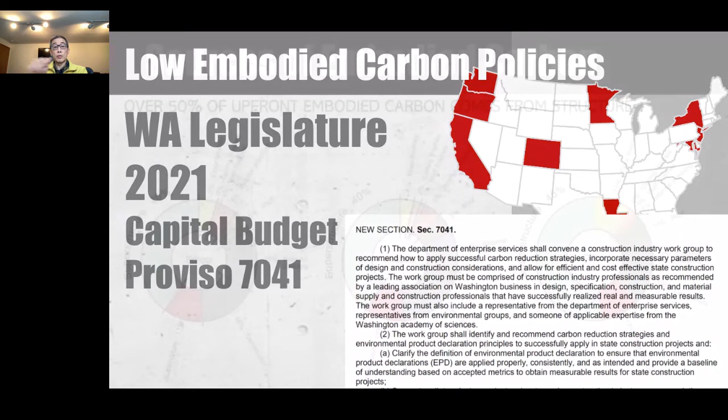There are a number of other bills around the country, as well as regulation and legislation, many of them called Buy Clean Acts, which seek to reduce the embodied carbon emissions of our construction materials. We know from research that more than 50% of the upfront embodied carbon comes from the structure, the superstructure and substructure of buildings.

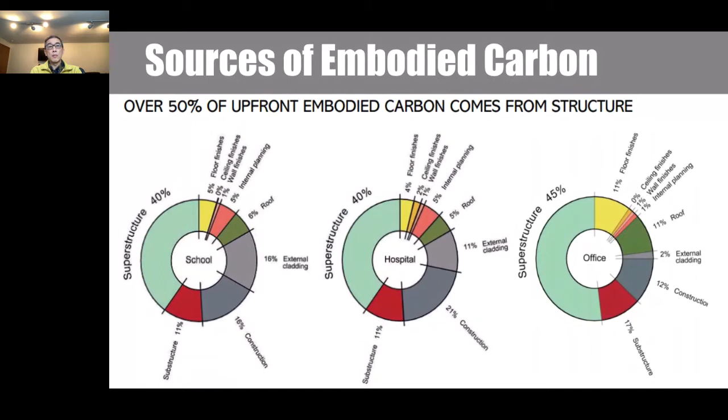Hospitals, offices, schools all basically say that if we want to reduce embodied carbon, it comes from the structure. So currently there's a green material narrative addressed to specifiers, the architects and engineers out there, where each material is competing against the others, but each also has its strengths: recycled content for steel, which is 90-something percent recycled content; for concrete, it's always a local material, you're not going to be shipping concrete from upstate New York; and wood, of course, is promoting its carbon sequestering abilities.

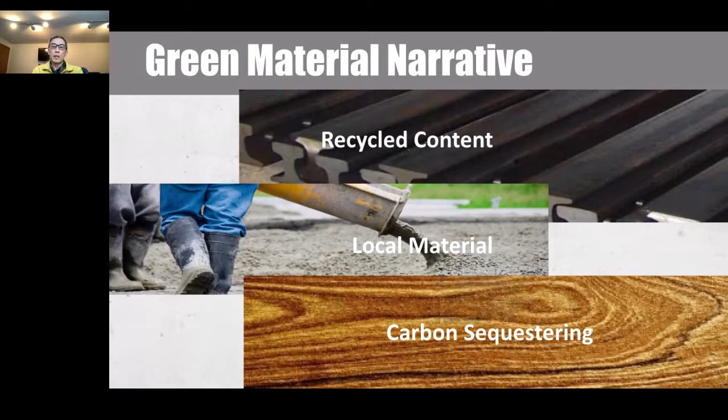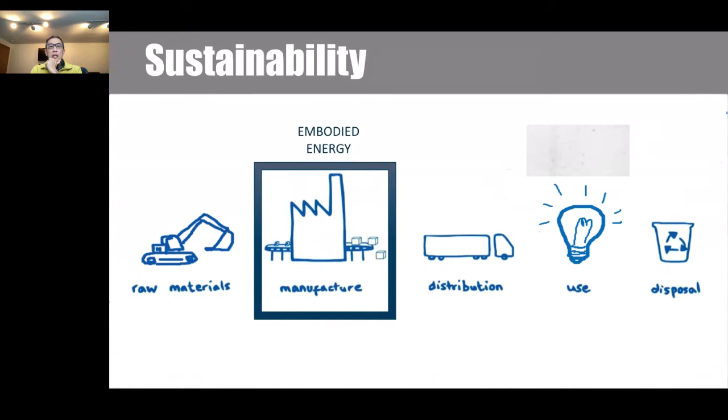But really, what we've learned in the past 5 to 10 years is that this language of single attributes, such as transportation distance, recycled content, or renewable materials like bamboo, is essentially a proxy for what we think is true sustainability. The true sustainability measure looks at all of these things at the same time and understands that everything we do has a trade-off. Using your phone, driving a car, using paper towels, all of it has trade-offs one way or another.

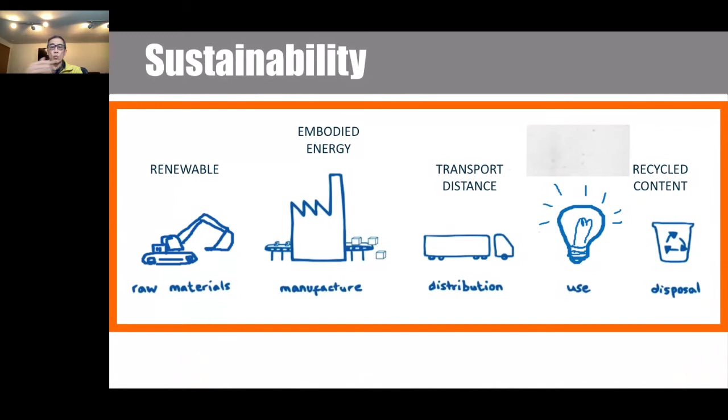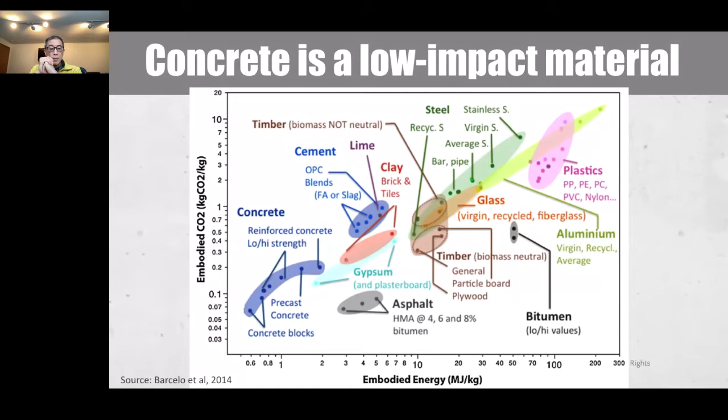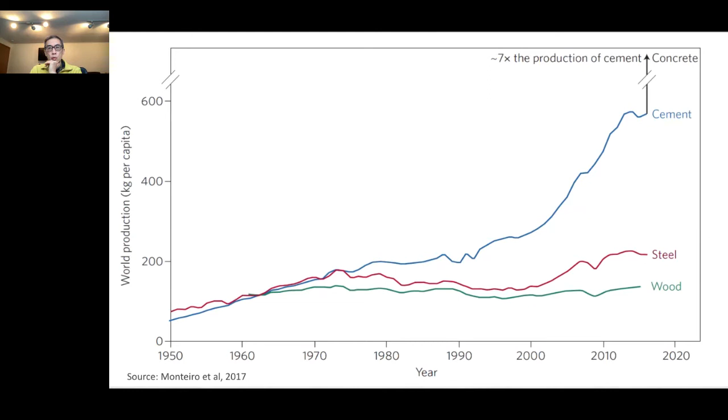But these numbers are on a per-weight basis, which isn't really meaningful because you're not using the same weight of materials. The reason you've often heard that concrete and steel are responsible for 8% of global greenhouse gas emissions is because the world uses so much of it. Developing nations are using concrete to build their infrastructure for progress, and the amount being used is essentially driving that number.

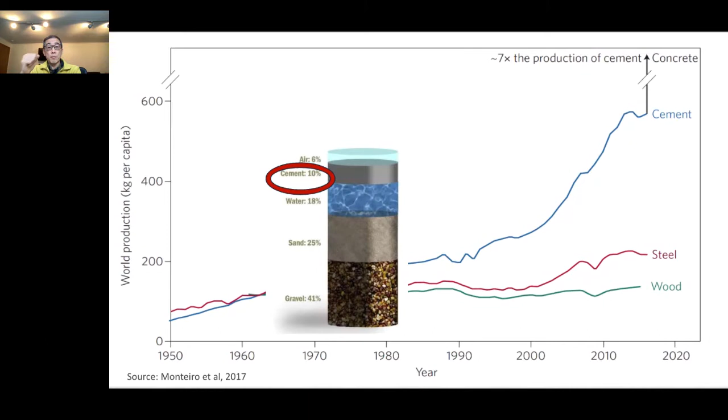I'm sure the audience here knows the difference between cement and concrete, but just to recap: cement is more or less 10% of the ingredients of concrete, which also includes fine and coarse aggregate, water, air, and some admixtures or other materials to meet particular performance requirements. Cement, as it turns out, is essentially 70 to 80% of the carbon footprint of concrete, so the drive to reduce the carbon footprint of cement is the primary goal for the industry.

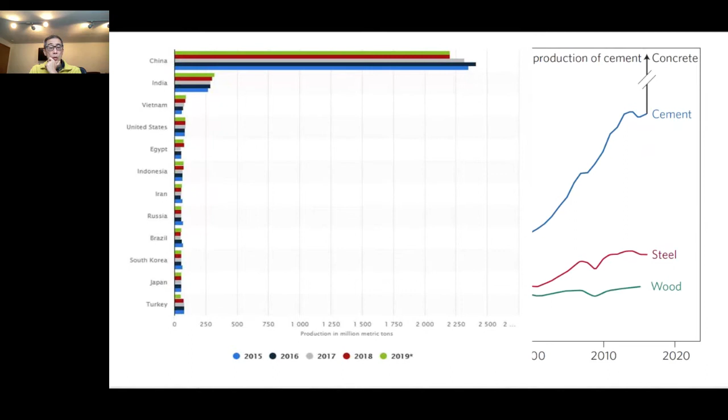However, having said that, the Global Cement and Concrete Association has already committed to a reduction to net zero cement by 2050, and that includes the major companies in China. So we are on our way to driving that number down, and everybody is working on net zero cements. There are a couple of plants being built in Scandinavia, and Bill Gates is secretly working on this energy source.

The biggest problem for cement is that in order to create the clinker, which becomes cement, you have to apply a lot of heat, which right now is only possible with fossil fuels, coal really. So the idea is to reduce emissions from calcination—a term you've probably heard—which is part of the production process, and drive that down to zero. People are working on it, and there's a plan. But we have to know that every material has embodied carbon emissions from across its life of use.

If you look at steel, the mining of the iron ore, the raw materials, to the production in the electric arc furnace, which is more efficient than the basic oxygen furnace, to transportation of the members, to its use, and then at the end of life, every one of these stages has some impact on our environment in terms of emissions. For steel, much of it happens at the end of life because it gets recycled back, so we can reduce the amount of emissions of the material by looking at the full life of it.

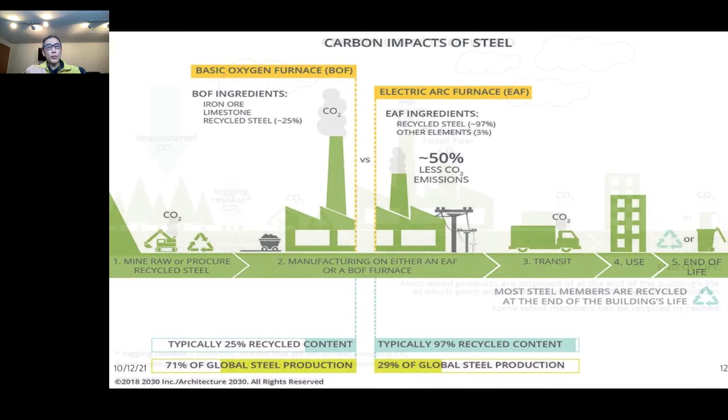Wood, however, is a different metric. A lot of the impacts of wood happen at the extraction phase, because think about how much of a large tree actually becomes a wood product. You're not using the bark, the leaves, the branches, the roots, or the soil that is also absorbing carbon in our forest. All of that is logging residue that is either burned as biomass, going up in the atmosphere immediately, or left on site.

And then obviously any production of materials has emissions for the creation of a wood product. And at the end of life, what happens to that material? Is it recycled, or is it in a landfill?

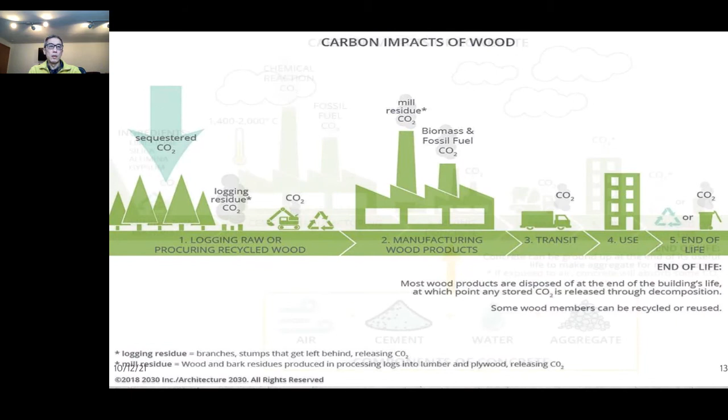And then I'll get into the details of impacts of concrete. But again, for concrete, the cement manufacturing is the primary driver of the carbon footprint. That is the fossil fuel use and the chemical reaction called calcination that releases carbon. Concrete itself is probably only 20-30% of that whole assembly's carbon footprint, primarily because you always use local materials, as I said, when you are getting sand and aggregate, which is everywhere around the world. You're not transporting it that far.

There's a benefit to the use of concrete. I'll talk about that later for the use phase, unlike steel or wood. And there is carbon sequestration that happens with concrete as well.

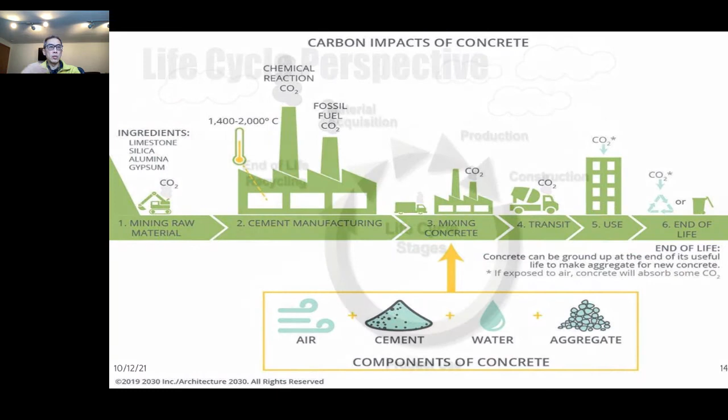So take a life cycle perspective when you're looking at carbon and also other environmental impacts when you are considering materials, any materials. I'll take a break right here if there are any questions that might have come up.

Anything? Nothing. Yeah. Nope, okay, there's nothing. I'm just confirming there was nothing so far.

Okay, thanks Grace. Yeah, so if we take a life cycle perspective, we can look at the product or the material in each stage of its life and see how we can apply strategies to reduce the carbon or other environmental impacts in these stages. So I'll just be going through this.

You don't have to read this. Material acquisition and production, construction, use phase, and the end of life. All for concrete has an opportunity for the designer and the engineer to reduce its carbon footprint.

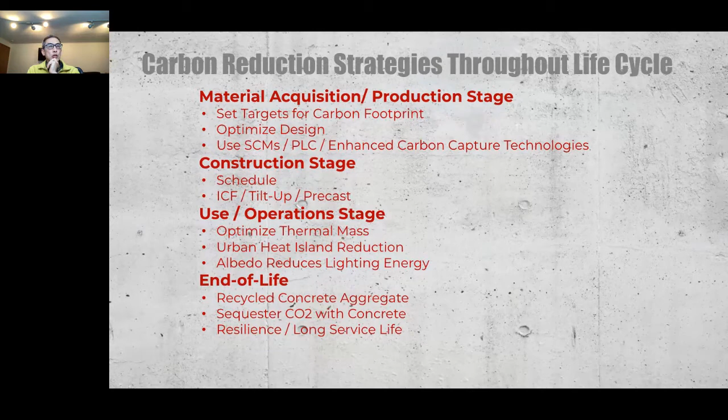And so I used this term many times in the beginning of this presentation, embodied carbon. Really, embodied carbon happens throughout every stage of the life of a product, from material acquisition to production, and the construction, use, and end of life.

For the use phase, it's the replacement of material. Think about your roof shingles, think about paint. Those are products that have a life that has to be replaced. So that is a part of the embodied carbon.

But much of the discussion in the design world today, and also legislative action that I mentioned before, is about embodied carbon upfront, initial or upfront embodied carbon. And that is primarily focused on material acquisition and production.

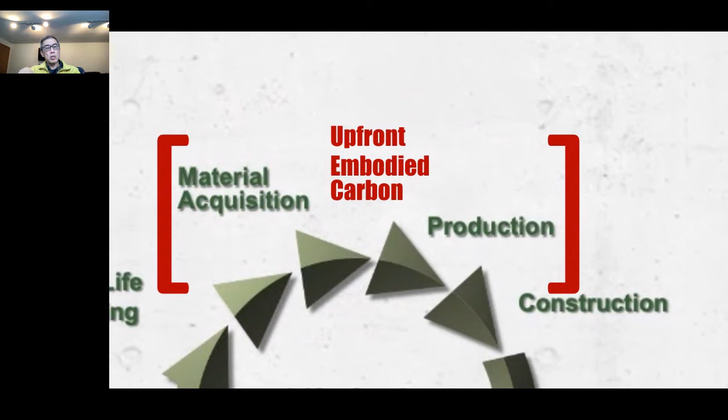So one of the main strategies, the most important strategies, is to understand and set targets for your project. That is to say, setting a carbon budget by understanding the project's carbon emissions and making sure that you work with and communicate those targets to the whole team, including the producers of concrete or other materials, for instance.

And many times we know, even from my work, the architect or the developer is so far removed from the production of the material. The concrete contractor, maybe not even talking to them, to the general contractor. And so having the whole team understand the goal is very important.

And there are tools out there right now that we can use from a design standpoint that, you know, some are free. Athena is free. Tally can be integrated into your Revit. One-Click is also more popular in Europe, but getting popular in the US here. EC3 is also a great tool that makes comparisons. It's not exactly a life cycle assessment tool, it just takes the data and makes comparisons. And you can use this little equation I put on the bottom by saying, look at all the mixes in your project and combine them to be a sum so that you can use that as your footprint.

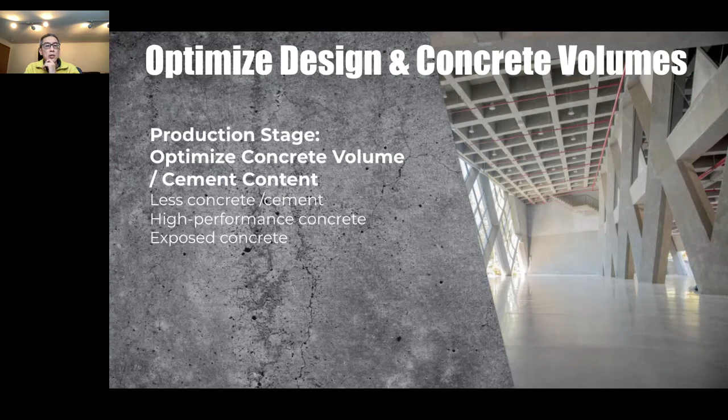Of course, we've all known for many years about SCM - supplementary cementitious material. SCMs are industrial byproducts, and pretty much all concrete in the United States already uses SCMs, because in the old days we used to call it 'oh, let's recycle some content and make us feel good about it' by recycling stuff from other industries. But we really know now that SCMs improve the performance of concrete - maybe not in early strength, but in ultimate strength and in workability of the material.

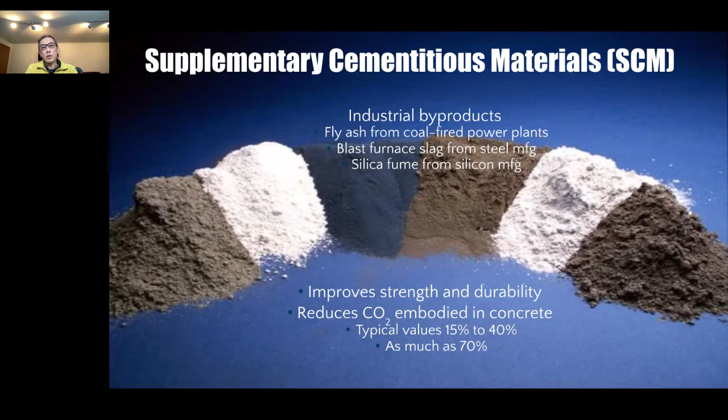It is the easiest solution we have right now. You can just use this to drive down the concrete carbon footprint with any producer by simply adding this material. I say simply - there's actually a shortage in many parts of the United States, including here in the Pacific Northwest. One of the important things the cement industry is doing is bringing blended cements into the U.S. market.

Blended cements have been used for 30 years in Europe, 10 years in Canada, somehow very slow to come into the U.S. market. It's a little bit complicated, but it has to do with our history of separation of our cement industry from the concrete industry. The concrete guys didn't trust the cement guys and didn't want them to give them cement that was cut with other materials. So they wanted to blend the cement with SCMs or other products themselves at the concrete plant.

Right now, Portland limestone cement is widely used in the Seattle market, Oregon, and just starting out in California, some in the Northeast as well. It's an easy way to immediately get a 9 to 10% reduction in your carbon footprint without changing anything else about the concrete, simply by using Portland limestone cement.

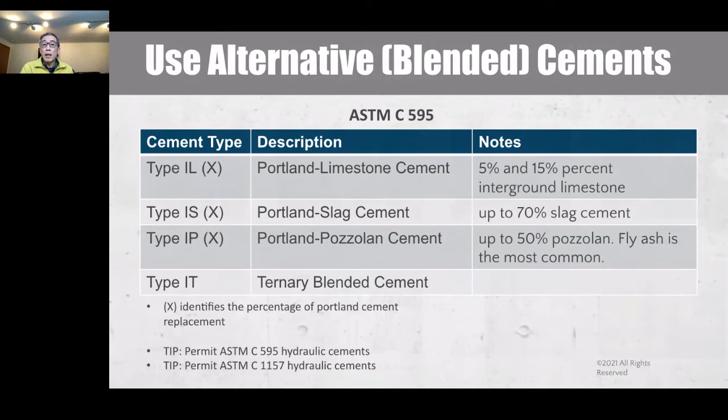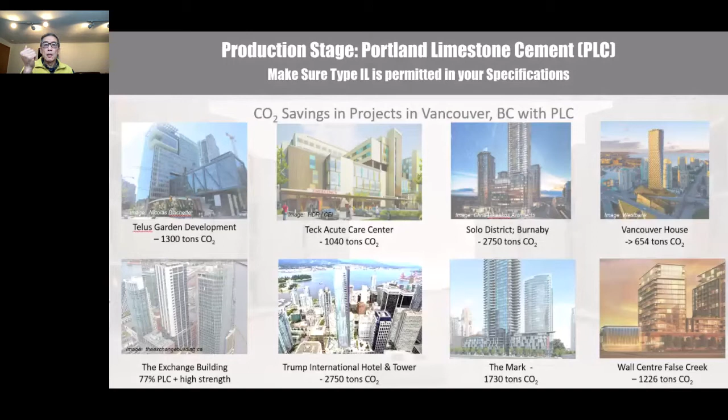There are tons of examples in British Columbia using Portland limestone cement, and these projects have all reduced the carbon footprint of their projects. Essentially the three major producers in the Seattle area, that's all they're using right now. So you could be getting Portland limestone cement and reducing the carbon footprint of your next project without even knowing it. Making sure you have it permitted in your specifications is important.

Another item in the production stage is enhancing carbon capture. Carbon capture, utilization, and storage is the big term for lots of climate activists right now. That's the future of all materials, and that's how we're going to solve the climate problem. I've been hearing that from people for the last decade, in fact, from people at Weyerhaeuser, where I used to work, over 20 years ago.

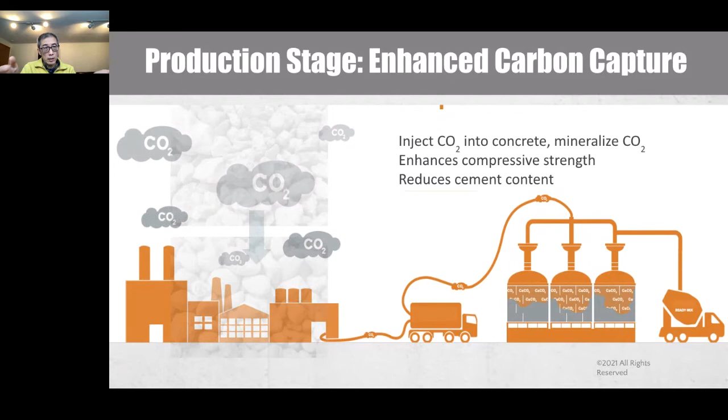The idea is that we want to use carbon the same way you use carbon in your soda pop, Coca-Cola, Pepsi — either injecting it or using that carbon dioxide in the creation of new aggregates. This carbon mineralization is already happening right now in concrete, with a number of different pilot projects. San Francisco Airport used this aggregate.

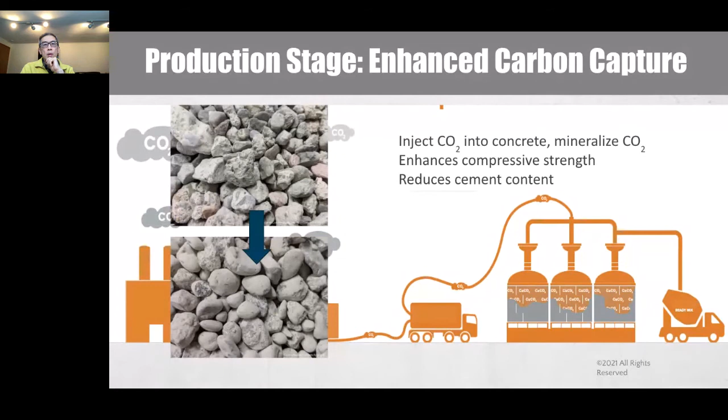All right, so any questions on some of those innovations at the embodied carbon extraction and production phase that coincide, align with what architects and engineers can do? Anything? No? Okay, I'm not seeing anything. Go ahead. Okay, anybody there?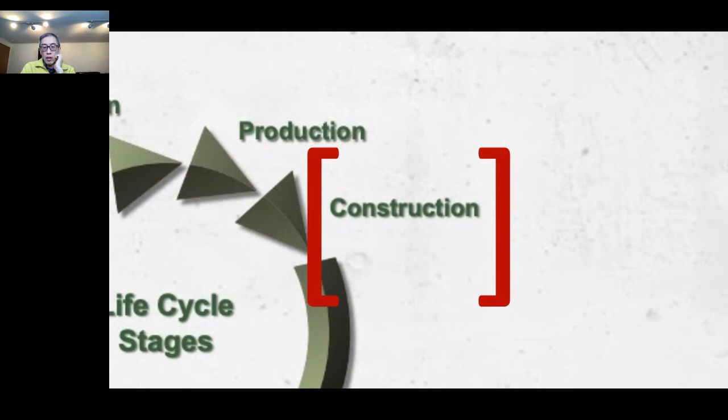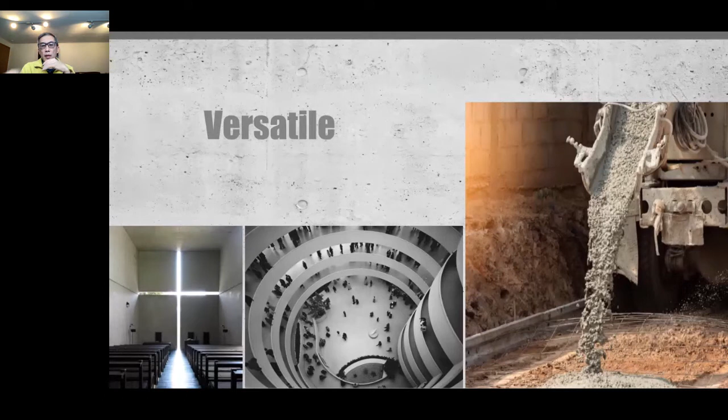At the construction stage, there are also things that can be done to help reduce the carbon footprint of material. We know concrete is a versatile product. At the same plant, you're getting different mixes with high strength, flowable concrete, something you can pump a long distance, something with a finish like the church Tadao Ando did. Everything can happen in one plant just based on the type of mix specified.

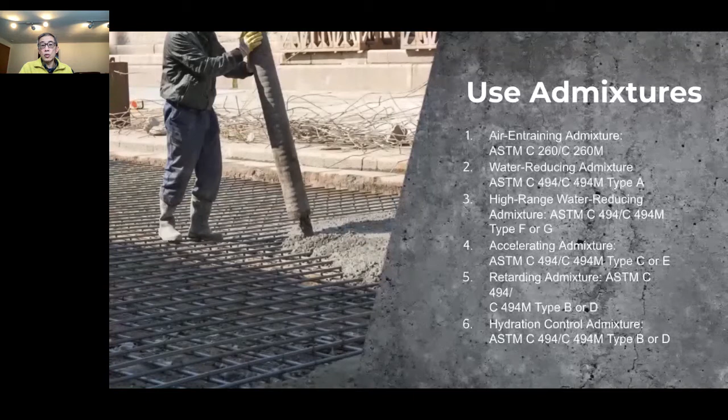One of the most important innovations we've always been using, but haven't thought of as a carbon reduction strategy, is admixtures. High range water reducing admixtures are so effective at reducing the amount of water content. Remember, concrete strength comes from the water cement ratio, and you have to keep that constant. When you reduce the amount of water, you reduce the amount of cement, and keeping the same strength, you can reduce the carbon footprint of any mix by 12% simply by using a high range water reducing admixture in a project. So admixtures are very important to reducing carbon footprint.

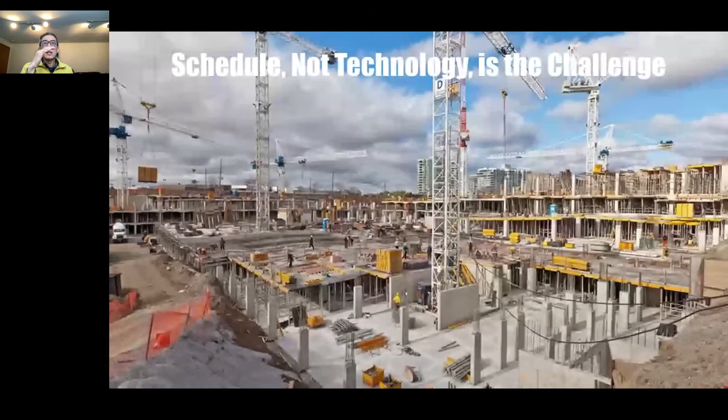But more importantly, we already know that technology isn't the challenge — it's actually scheduling. When we have to pull forms from a PT deck, for instance, we know we have to have a lot of cement content. You cannot have a lot of SCMs in that because in 3 to 5 days the contractor wants to pull forms. Essentially, our concrete is designed for contractors, not really for the project.

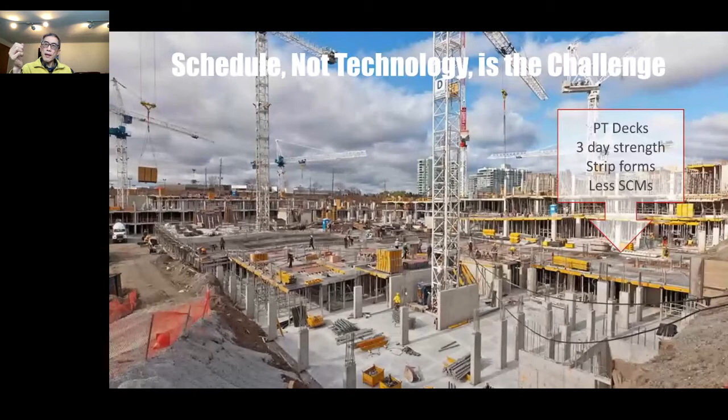We can build the same things the Romans did a thousand, or more than two thousand years ago, but we don't have the luxury they did of time. Our owners and contractors want things done very quickly because time is money. So when you need high early strength, you need a lot of cement. But if you had mat slabs, footings, shear walls — projects where you don't care about high early strength and only want later strength at 56 days or 90 days — you could put in a lot more SCMs because you don't care.

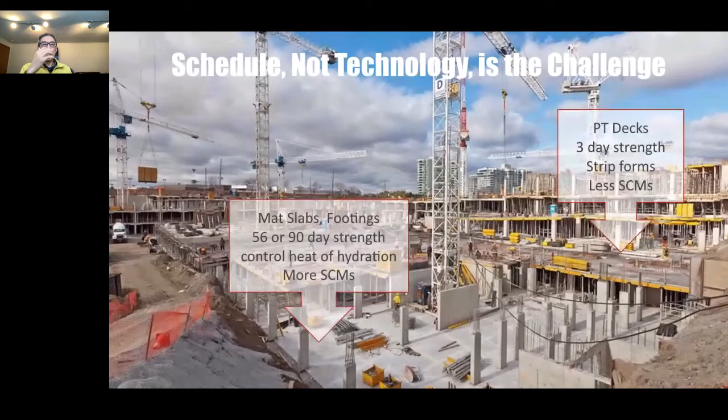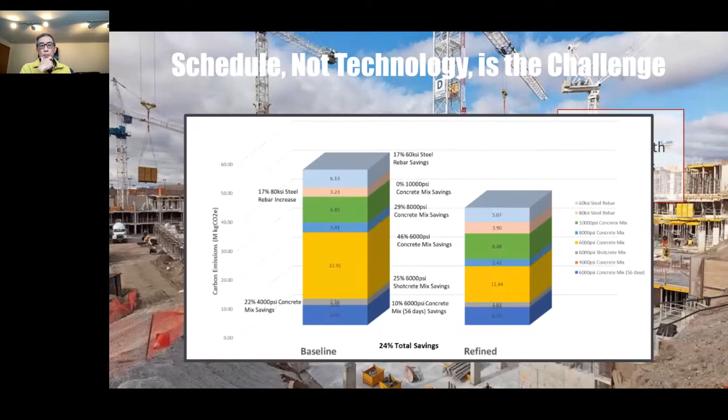So you want to balance the mixes with the different type of performance requirements that you needed. Here you can see a project, a baseline that has all the mixes, whether it's for 4,000 psi or 10,000 psi to 8,000 psi. This is obviously for a very large building. You can compare it to the baseline by driving down those mixes where you need to get to a lower carbon footprint. This happened essentially in the Helen Sommers building in Olympia.

Obviously, there are also innovations. I kind of use the term lightly, innovations, but innovations such as insulating concrete forms, SCC, tilt up, SCC for really large buildings. Essentially, that's how we build high rise. We've got to be able to pump it and flow it very high up.

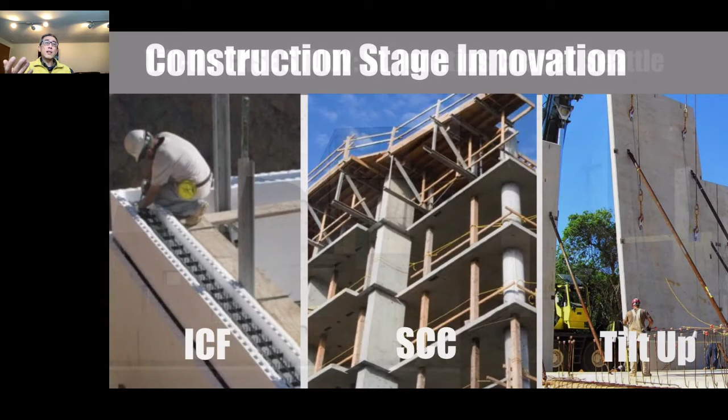Things like tilt up, we already have great examples here on small scale projects even. It doesn't have to be the Walmarts and the Home Depots. It can be like the St. Ignatius Chapel that we have. This is a tilt up project and can go up very quickly. And the speed of construction obviously saves time, money, and the amount of carbon that is being used in the construction process.

And so another ICF project that's a passive house in New York, the Bluestone organization essentially uses ICFs solely, and they do affordable housing in New York City.

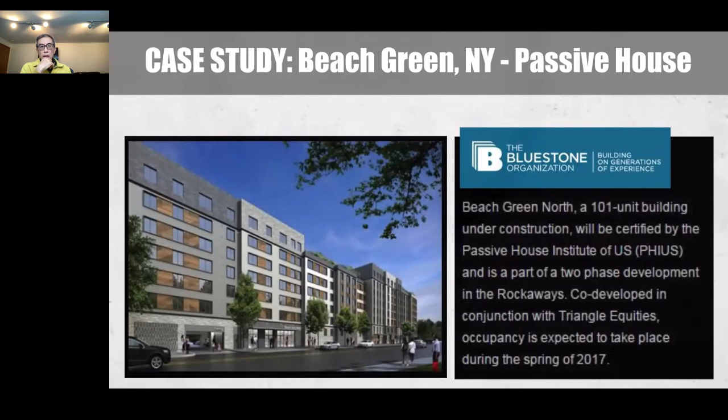Okay, so the production and construction phase, we've heard there are opportunities to reduce your carbon footprint. Product use, most materials have nothing to do with product use except when you replace the material. And when you look at concrete as a material, we know it lasts a long time. So we want to use material where we need it for its strength and durability. But concrete also has, because of its...

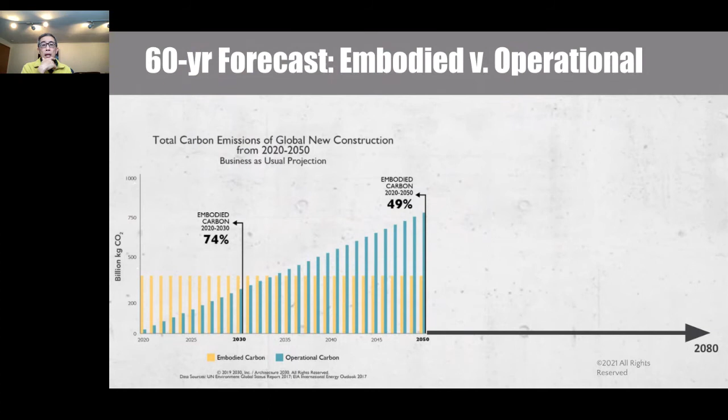Opportunities to last a long time, we see that the first graph that we saw where the looming deadline of 2050 from the Paris Accords doesn't think about what happens to the project after that. We know these buildings, especially ones that will be built in concrete, will last another 60 years, for instance. And in that time, we'll know that the embodied carbon will remain the same pretty much with some replacement of materials. But for a durable material like concrete, it'll essentially be only a quarter of the overall carbon of the project.

In a 60-year forecast, we'll see that in fact the operational impacts, that is the heating, cooling, electrical use, will overshadow the embodied carbon. We have to plan for that.

If you think about having more embodied carbon in terms of insulation in your project, there's obviously a break-even point. But if you have more insulation, you might save more in the operations in the long run. So having initially better windows, triple glazed windows for instance, all of that costs more in terms of embodied carbon, cost of carbon, but benefits in the long run.

And so we have to understand that the decisions at the initial embodied carbon stage, production and extraction stage, affects the operations phase as well.

We know the benefits of thermal mass. Those of you who worked in high mass buildings such as rammed earth or concrete know that there is benefits of moderating this thermal lag and dampening the peak demand of energy, allowing not only cost savings from reduction of HVAC equipment, but also more comfort and reduced carbon in the operations phase.

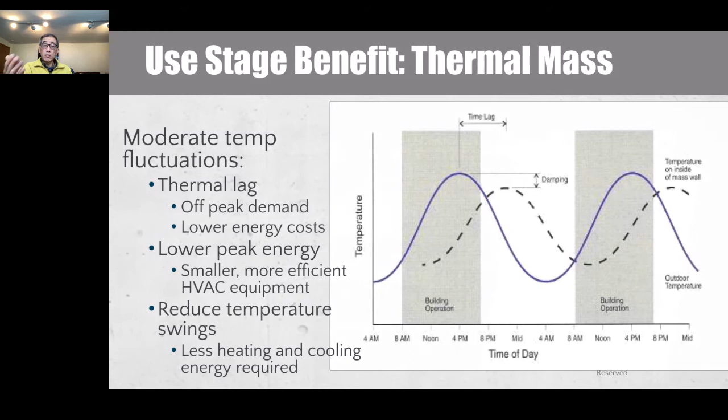This is the strategy that the schools in Kentucky use, we can learn a lot from Kentucky because we don't do this right now in Washington State. The net zero schools, there are dozens and dozens of net zero schools in Kentucky, and they were the first ones to do this. They essentially get the paycheck of one school teacher every month from the utilities by having a building that is net zero.

Richardsville Elementary School just happens to be the first one. And when I was on the Code Council, we talked about how much we can put into the walls, the envelope of the building, to make the building even more efficient.

But there is a point of diminishing return for our buildings. We can't all make buildings that are so super insulated like Passive House. We should, but right now it becomes cost prohibitive, as well as something that some folks are still only getting to understand.

But what we can do is reduce the amount of heat island effect that encroaches onto the building. In hotter climates, for instance, the heat island effect of our asphalt pavements and parking lots can drive up the heat around the building that has to be cooled. It can be 3 degrees warmer in residential zones and up to 7 degrees warmer in commercial higher density zones.

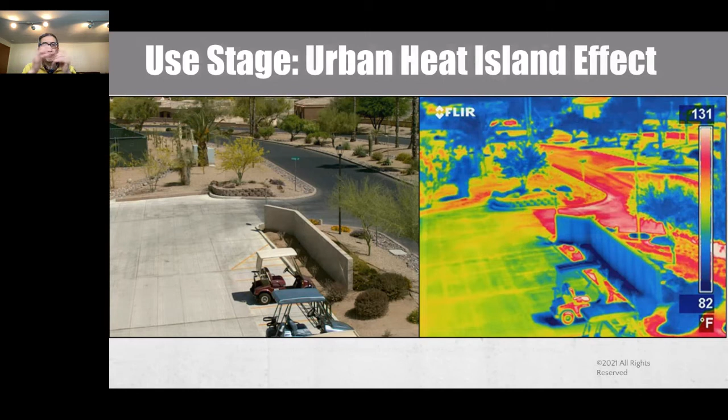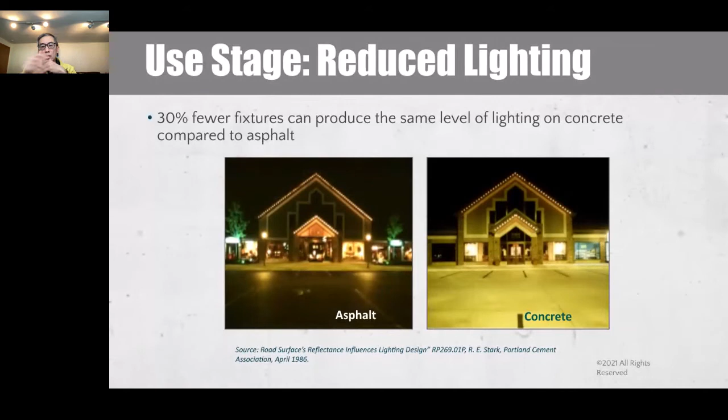So there's an opportunity to reduce the amount of heating and cooling by using a high albedo material like concrete, meaning lighter in color. Same thing for the amount of lighting you need when you think about lighting a parking structure. So again, this is energy use in the operational use phase.

I'll take a break right now. Any questions on that so far?

And then there's a question regarding an earlier part of your presentation. It's from Cindy, and she says: Is concrete with bubbles more wasteful than no bubbles? Recommendation for someone building a structure to access the information you're giving to make the right choice around optimal cement with sequestration abilities.

Well, concrete with bubbles and without bubbles is not necessarily related to sequestration, so they're two separate topics. Concrete with bubbles, meaning air entrainment, should just be used for exposed concrete outside. And using the EPDs will give you quantifiable differences in the concrete mix. So you basically have to work with the producer on that one.

But all of these strategies combined should add up. It's all additive, so you can help yourself out by choosing many of these strategies. I'll finish up and then see if that answers the person's question.

Okay, end of life. End of life is important because concrete is one of the most recycled materials out there, probably less than steel, but it is being recycled because C&D waste is very expensive. Nobody wants to pay for concrete to be dumped in a landfill. So much of it, especially in Washington State, is already crushed and used as roadbed. And recycled concrete aggregate is in our laws to be used in fresh new concrete.

So the embodied carbon used to create concrete in the first place can just be maintained by putting it into fresh concrete - not all fresh concrete, just a little bit. And it would certainly help to sequester, to use that term - even up to 30% of recycled concrete aggregate wouldn't change the concrete mix significantly. Obviously the chemistry has to be known by the producer, but that is a way.

But concrete is already a sequester of carbon. It's estimated that 20% of the emitted carbon dioxide is being sequestered by concrete throughout its life. It's called carbonation. It's something that we don't like - we try to solve this thing - but we see carbonation happen to concrete.

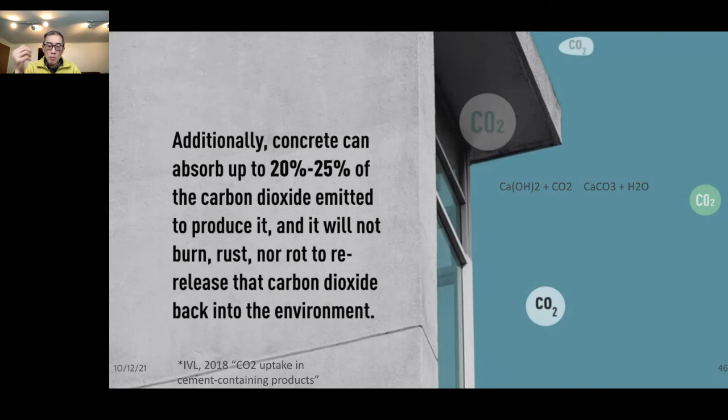And in fact, the IPCC has directly addressed this by putting it into the most recent assessment, to understand that the reabsorption of the carbon that was emitted by concrete is being sequestered back in.

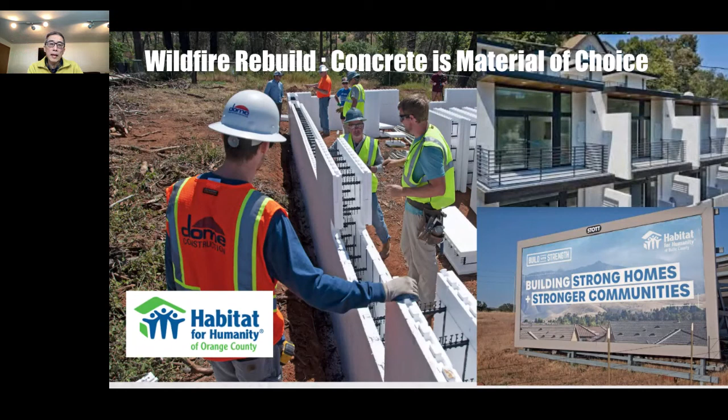And right now we are working with a number of Habitat projects around the country to rebuild from a lot of wildfires that you saw, and elsewhere from tornado damage. In fact, I'm going next week to Paradise, California. If you remember, Paradise, California was totally devastated by a wildfire. We are rebuilding that with Habitat, using a material that won't burn in the future.

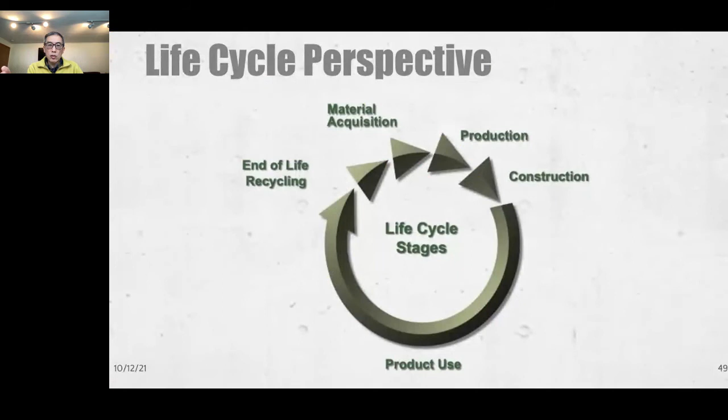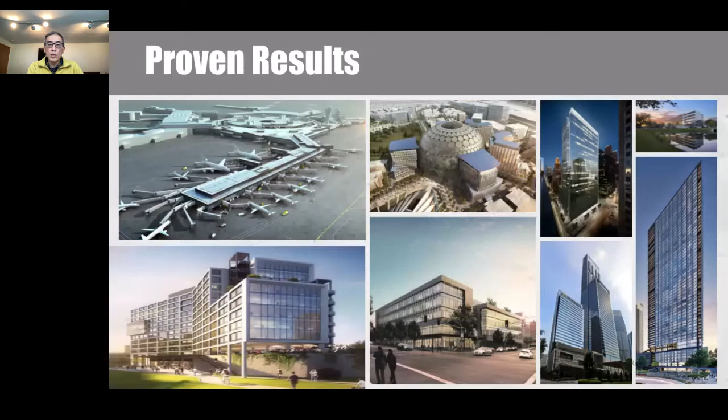So to end my talk, look at the whole life cycle when you consider a building's environmental impact, and there are many proven results. Sorry I didn't show any residential projects, but certainly there are many projects that use concrete, even on a residential scale, that can reduce this carbon footprint when you take the whole life into consideration.